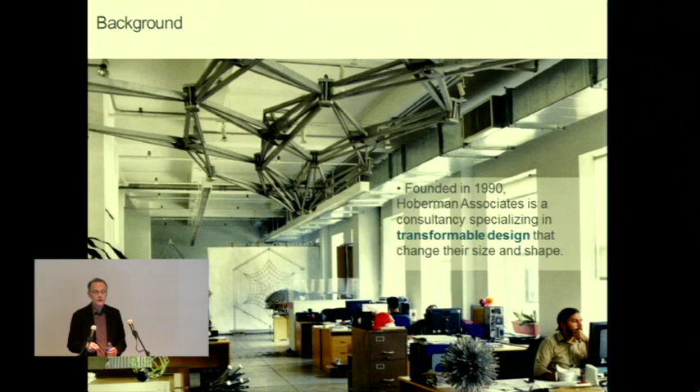I have a small practice in New York City, which is a design and engineering practice. We've basically characterized what we do as working with transformable design. To this group, I don't really need to define transformable, but I will because it's part of how I frame my work. For me, transformable is making objects, and those objects could be toys or stage sets or products or artwork or even buildings that change their size and shape physically and in real time.

These are some of the transformable projects we've done over the years. Our idea is not necessarily just how do I get from A to B, but what really are all the in-between states, the process of transformation, the qualities of that. I'm going to talk about this in a number of different ways. So we might start with this concept of size change, shape change, transformation in nature. If we look at water flowing or clouds morphing from one shape to another, this is kind of the idea of what I aspire to in design.

Or beyond something like clouds, we might think about organisms. We know there's no intentionality to evolution, but there's a kind of direction to how shape change and size change fits into the larger evolutionary program of adaptation. And of course, it takes a very long time for species to change their form and adapt from one stage to another. Or we might look at how organisms change within their own lifetimes, the morphology of an embryo changing; we're all changing size and shape, birth to death.

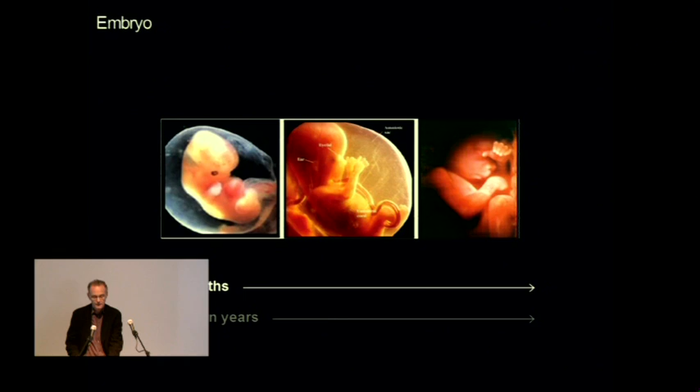And of course, designers do design things that transform all the time. Really towards the beginning of my career, there were those first animations of shapes changing into other shapes. Terminator 2 was a real big one when that first started to appear. Now we can design transformation, but generally in the digital world. It's virtual, not physical.

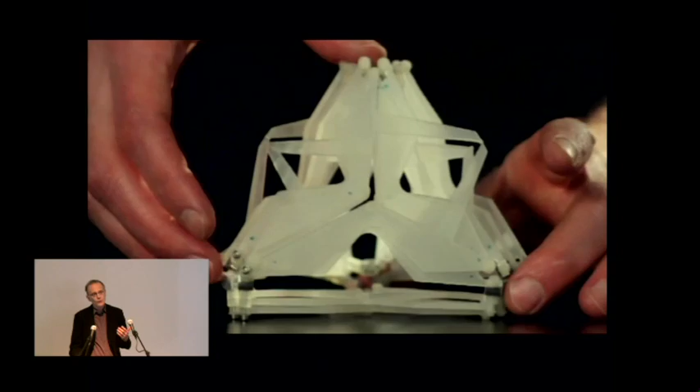So I am, by training, a mechanical engineer, also a sculptor, but I love mechanisms. And one of the things that I love about mechanisms is their tactility, the touch qualities of how they change manually and with hands. But also that the way the mechanisms are very physical, but at the same time, there's always something kind of ineffable about them, and that non-physical quality is the motion itself. Motion isn't really a physical quantity, it's about changing relationships.

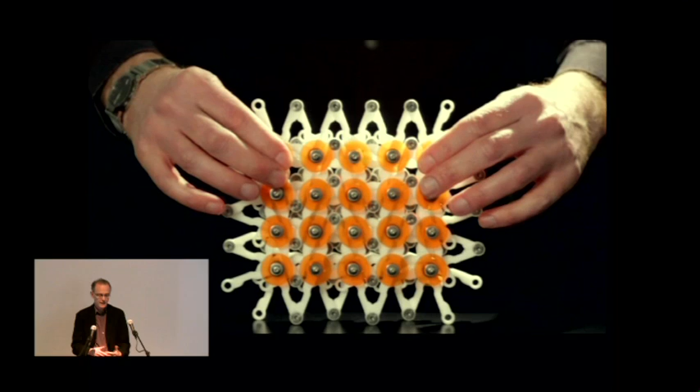And for me, mechanisms, you could define them as an embodied system of relationships. And designing mechanisms is a tradition of design that goes back hundreds of years. And it's something that I love. So we might start with basic paradigms of what these things are.

Traditionally, the way that you think about these engineering paradigms, and it still is true today in engineering schools, you have structural engineering and you have mechanical engineering. A structure, it's all about what an object does in relationship to forces. A structure will resist forces, but a mechanism takes those same forces and converts them into motion. So that's a kind of a dividing line, but of course it's somewhat artificial, because when we make something, structures always move at least a little bit, and mechanisms have to resist forces as well.

But then within mechanisms themselves, again, this is a little bit on the engineering side, traditionally, when I studied mechanical design and studied kinematics, the whole idea of designing a mechanism was to design a motion path, to design a trajectory. The mechanism as an object wasn't really the point. It was what it did. And this goes back to what our definition of a machine is. It's there to perform tasks, not just to be a kind of a designed object.

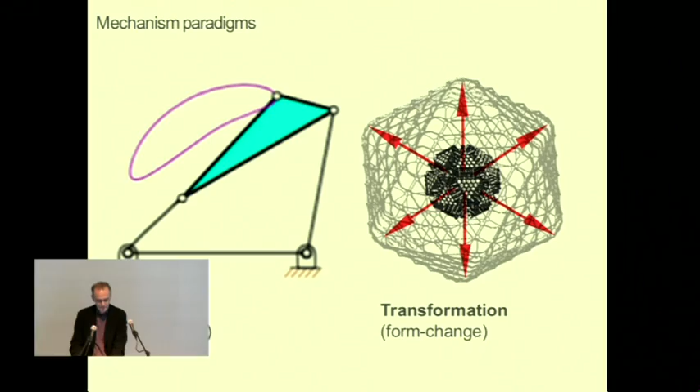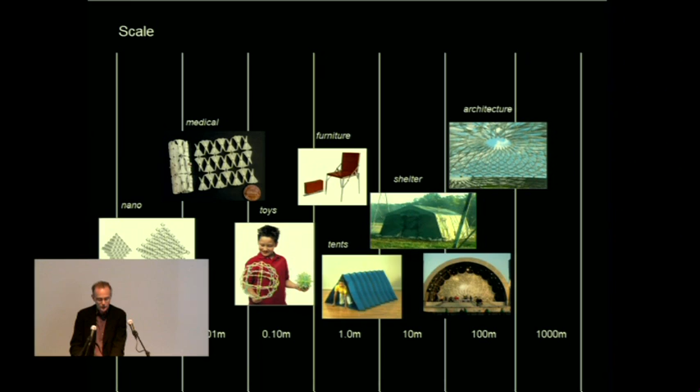And what you'll see in the work that follows is a different paradigm for a mechanism, which is transformable. In other words, it's focusing on the object. The function of the object is to transform itself by itself. And over the years, this idea that I have been working with now for decades has been implemented at a wide variety of scales in a wide variety of sectors, from miniature medical instruments up to architectural scale, with a lot of continuity of the concept through all of these different applications.

So just on the small scale, this is some work that I've been doing with the microrobotics lab at Harvard to make mechanisms that are in the millimeter range, and this is a little Hoberman linkage, about 8 millimeters across. And then at the other range, a project which we'll talk about a bit more, which is a retractable roof that we're working on now. Scale of the stadium is about 140 meters. The roof itself is about a third of that span.

You guys can get your own shot. No, don't worry. You should, because I'm terrible at sending stuff. Wow, we have a soundtrack. Do we have an AV person in the room? This panel has not been screwed down. Oh, I see. It's the video. Okay, I'm going to turn the sound off. There's a stray video. All right. Don't worry, guys. I'm not mad. Just slightly. I'll just delete that. It's off to the side.

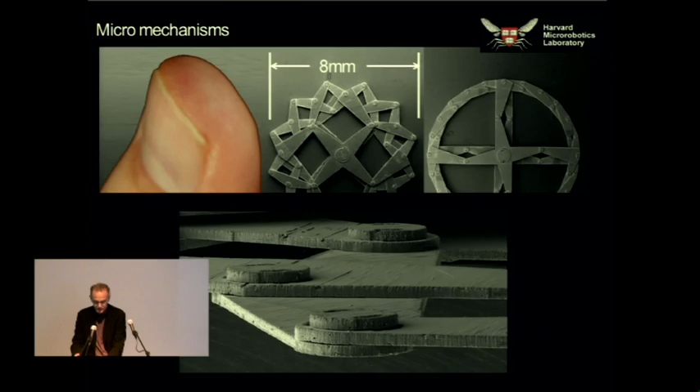So the thing that's, honestly speaking, striking is that the actual design of this object and this object in many ways is not dissimilar at all, and yet there are 3 or 4 or 5 orders of magnitude of size between them. So they're principles that are carried over very, very different scales.

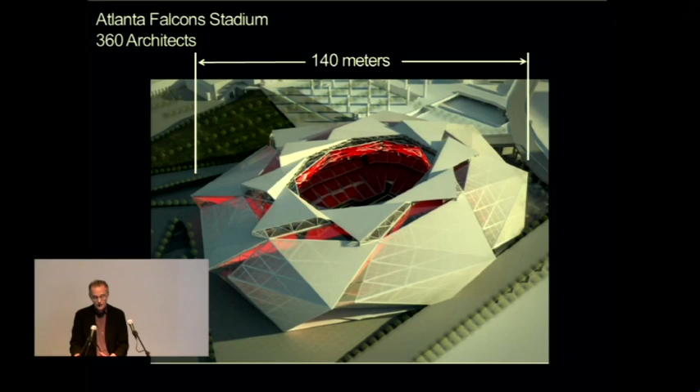As a designer, somebody who was originally trained as an artist and has gone on to work in engineering, I look at all of these as very creative directions and options, and that there's a kind of a continuity between the work of an artist and the work of a scientist. And in between is this idea of invention. And I am an inventor. I have patents. I've always liked the idea of invention. And when I think about invention, I like to look at what people have said about it who are inventors themselves. This is a quote from a French mathematician from the 19th century, which I love.

"Thought is only a flash between two long nights, but this flash is everything." And that's it. That's the aha moment. That's the light bulb moment. That's one of the things that I love about what I do, is there's always that chance that you'll be stepping out of the bathtub or whatever, and something pops into your mind.

So I'm going to talk about one invention that I had that goes back some 25 years or so that really informs a great deal of work since then, but it was something that really came in a flash. And I'll show you a little movie of this, and I think that you'll get what it is pretty quick.

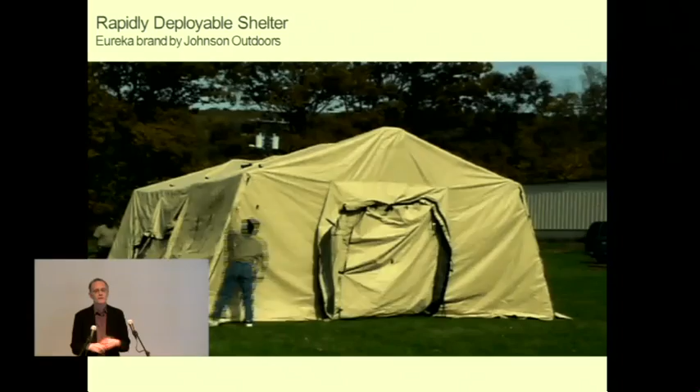So in this case, it's really trying to work in a very practical, physical way with a few people to get up a shelter very quickly that also is very strong for wind and snow loads, et cetera.

But the other side of this kind of physical reaction to these things is you don't necessarily need to touch them. I've done a lot of work in science museums for kids, and you just watch these kids, their expressions and their gestures when they're seeing the sphere open, and it's because they're feeling it in their bodies. And I've seen kids literally just fall backwards when they see one of these things opening in front of them because they feel like it's hurtling towards them. And there's something just very intriguing about that, these physical responses to transformable objects.

As an inventor, what I try to do is not to invent devices, but to invent classes of devices, to invent mechanical typologies, if you will. And out of the short linkage video that you saw and the patent that followed, this was the basis for a whole series of structures that I call shape invariant expanding structures. What that means is that there's structures that get larger, but their shape doesn't change.

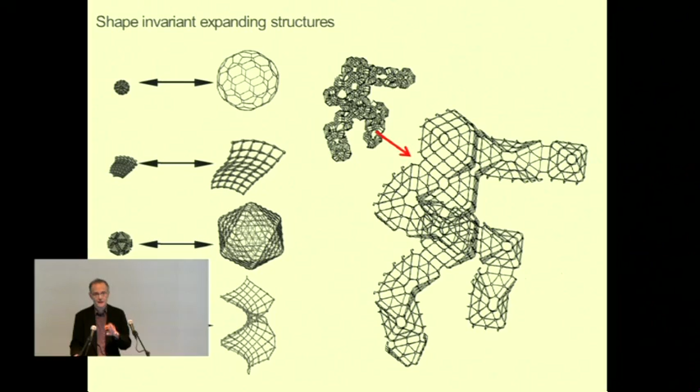And these are a whole series of different shapes that I've designed over the years, many of which have been built as well. The spheres that people are familiar with, sometimes they think the invention is the sphere, but in fact, it's the method to make expanding shapes themselves.

Making objects that expand but don't change their overall shape and profile has some other interesting qualities in terms of the motion itself, where all points are moving out in straight line trajectories from a center. So there's a kind of an expanding universe quality, and we use those straight line trajectories very often to create support points and motion paths. So this helicoid, this spiral, is held up by a series of straight line cables.

And here's another one of the sculptures in this series, a hyperbolic paraboloid, just another mathematical shape, and you can kind of see from the left to the right, this somewhat complex shape is actually just a kind of a pure scaling. And there's a lot of very interesting perceptual things about that type of motion. And here's an expanding dome that's being pulled out. It's about 6 meters across.

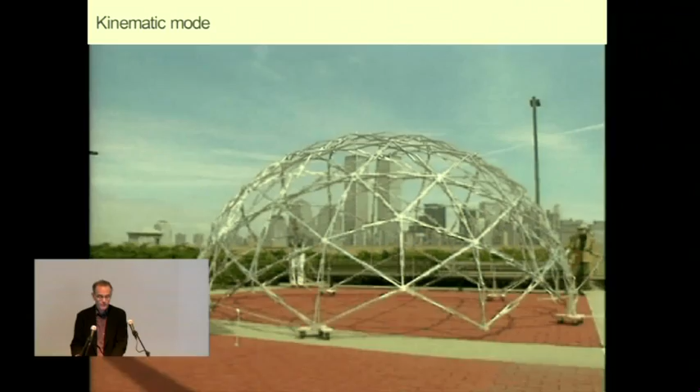So one thing that we might think about when we're making larger structures is you're making something that has to negotiate between its motion and its structural support. So we could say that something's moving from a kinematic mode to a structural mode. What you're seeing here is a dome, like a Bucky Fuller geodesic dome, that has many of the same qualities as a classic dome in the sense that it has the triangles, it has the shape, it has the same ground support. So what's happening here? How is something able to be both in motion and at the same time to be structural?

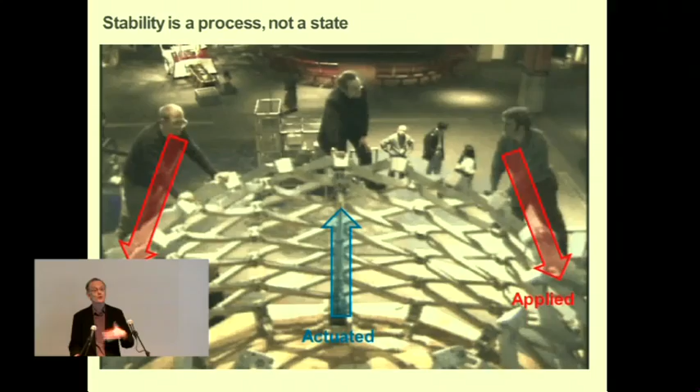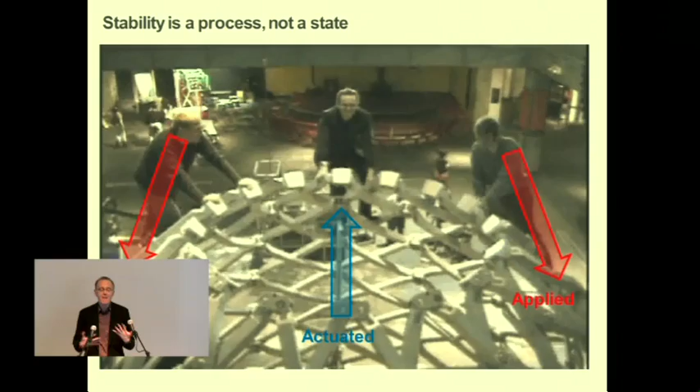This is me in an earlier day doing some of my hands-on testing. And the reality is that you're only making one object. It isn't like it goes from one mode to the other. It always has to negotiate the way that it reacts to these forces. So in this case, we're seeing a hydraulic cylinder that's pushing up on the dome. We're standing on it, which is kind of like an applied load. And this mechanism has to resolve all of these loads into what we might call a stable process.

Usually a structural engineer says it's stable if there's very small deflections. But when you're making a kinematic, a mechanical, a transformable object, you actually want it to move, but you want to move it in a way where it's safe and secure and in some sense stable. So it's kind of moving that idea of stability from a state to a process.

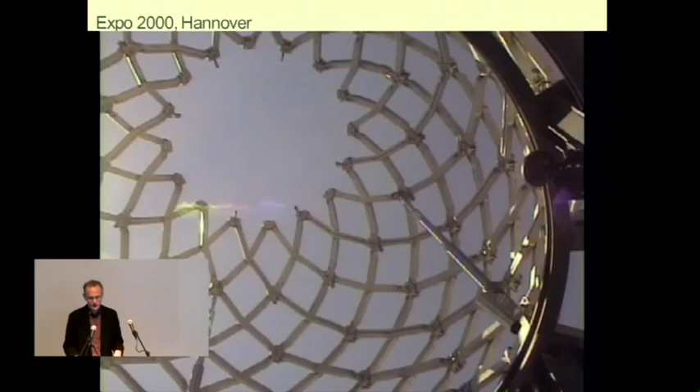And here's the same dome again as installed in the World's Fair in Hannover in 2000, where it was a kind of a symbolic representation of a historic cathedral powered by cylinders. It's about 20 feet across, made of aluminum. And I'll just show you a few more recent projects that we're doing.

This is a sculptural piece that we made for a couple of collectors in Bordeaux who have a vineyard, and was our first piece that we actually installed in kind of a natural setting, an expanding sphere on the terrace of their chateau. I like this slide because it shows a little bit of the craft of making these things. This is machined aluminum where these grooves have been machined in it to kind of reflect the light and kind of mix the light.

These are engineering challenges, but in a way they're also challenges of craftsmanship as well, with a lot of attention and focus on detail, on the joints, on the connections, on the actuation, and making all of these work as a system so that something like this can be installed, and in the same way that we're in a place where these buildings have lasted for hundreds of years, that something like this may not last for hundreds of years, but at least maybe for decades.

We've done a series of projects for live entertainment over the years. These tend to be a little bit intermittent and large scale, but they're some of the more exciting projects that we've had a chance to do. In about 2001, we were invited to build a structure for the Winter Olympics in Salt Lake City as a kind of a curtain where they gave the medals out every evening. So this was the Olympic Arch for Salt Lake City.

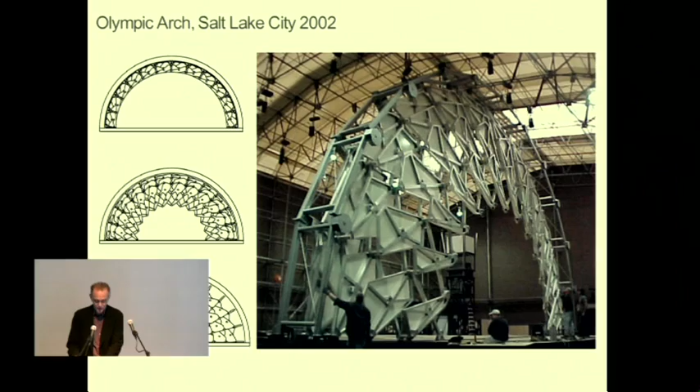And here you see it's about 72 feet across. And this was during the testing in Salt Lake City. So one thing I think about when I look at this video is standing in the freezing temperatures of Salt Lake City with the winds blowing. And there's a moment where you're taking this thing, which had been tested. This shows the indoor testing, which had happened earlier in New York. But there's a moment where you press the button, and it's terrifying. And your teeth feel dry, and you just don't know.

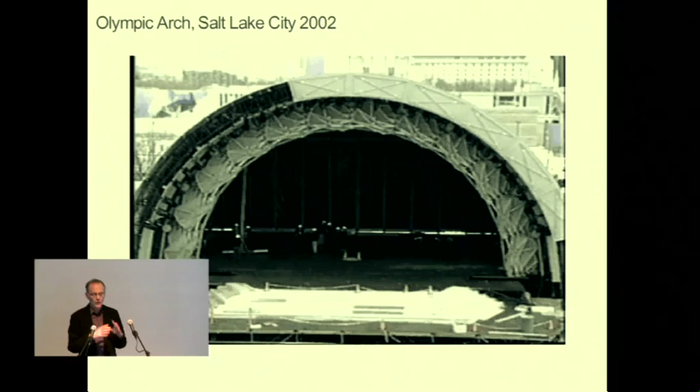But it is that sensation, which I think is the mood, the sensation of innovation, of having done all of this preparation and calculated all the risks and everything, but still you're pressing a button to say that 15,000 pounds is going to move a particular way. And it's exciting, and it's really what myself and my team are all about, going after those opportunities.

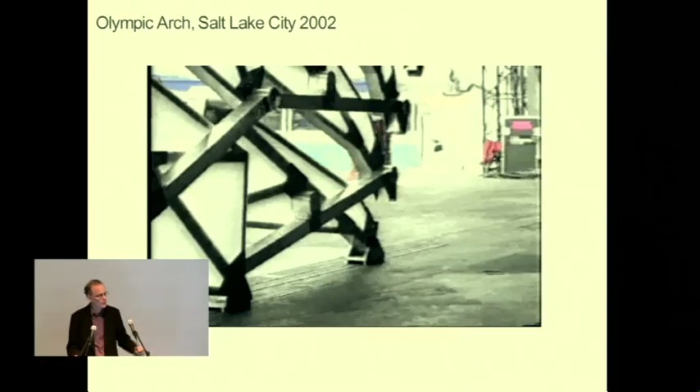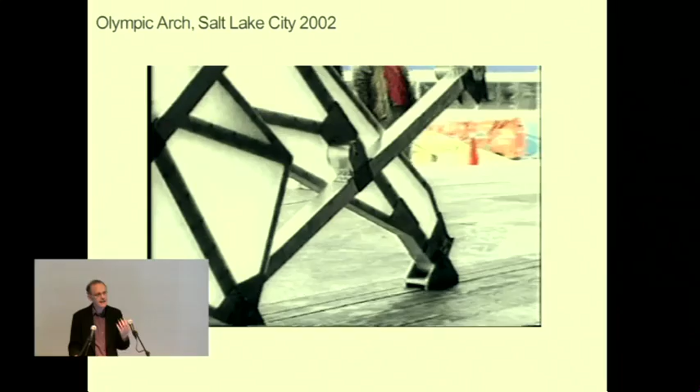So this particular piece is made of aluminum. It's a series of panels. Each panel is about 4 by 8 feet, like a sheet of plywood. It's aluminum extrusions backed by a polycarbonate backing. And so during the daytime, you look at it and it had a fairly tough industrial look. But then they would light it. This is 2002. They didn't have all the lighting options that they do now, but it was still these sort of Color Kinetics, multicolored lighting, and the way that the Lumasite material took the light was fantastic.

And then in the evening, it became part of the nightly show where they gave the medals out every evening, and you can see it opening here. So there was music, dance, the lighting. When the curtain first moved, there were some 20,000 people in the audience, and they really didn't know what to expect. Maybe they had seen it before on television, but when you see it for the first time, and it had all been choreographed, there really was this audible gasp when it first started to open. Really terrific project.

And then more recently, we had another superlative project, which was designing a transformable video screen for U2 for their recently completed U2 360 tour. And I'll take you through this project, which was really amazing on a lot of different levels.

By the way, did anybody see the U2 360 tour here? Always curious. One? Okay.

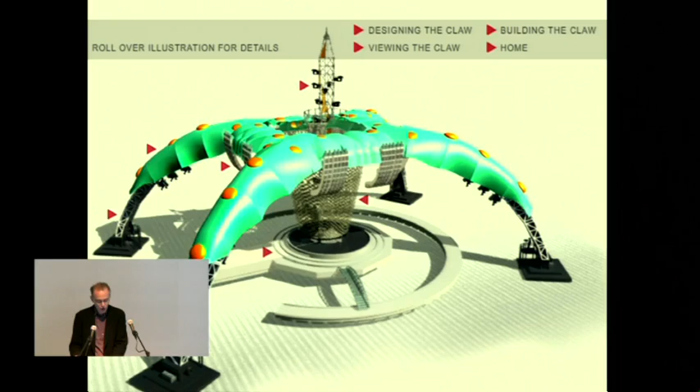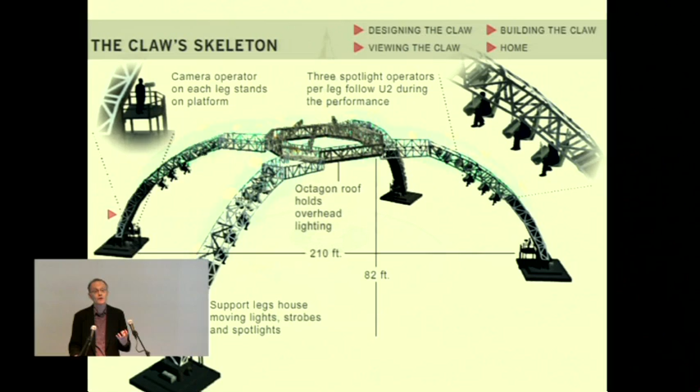The idea for the tour, it's an arena tour that traveled around. There's a big superstructure, which they called the Claw, which they would set up. And there were 3 of these steel structures built. And if you look at the scale, we're talking about not just building scale, but virtually infrastructure scale. This would be set up with a crane, clad with fabric, with a stage which had a lot of really interesting elements, rotating bridges so the band could walk from the inside to the horseshoe-shaped part of the stage. The speakers themselves are like a couple stories high. And then our piece was a video screen.

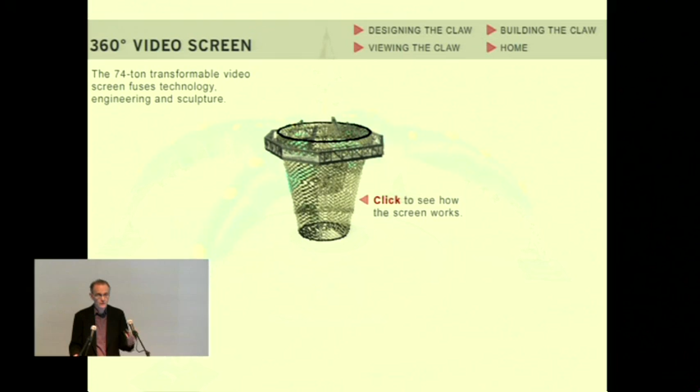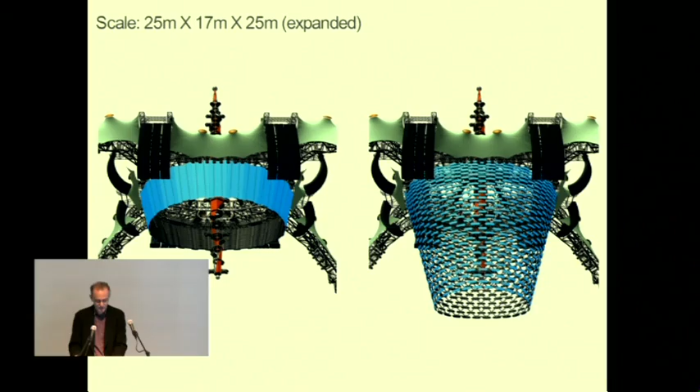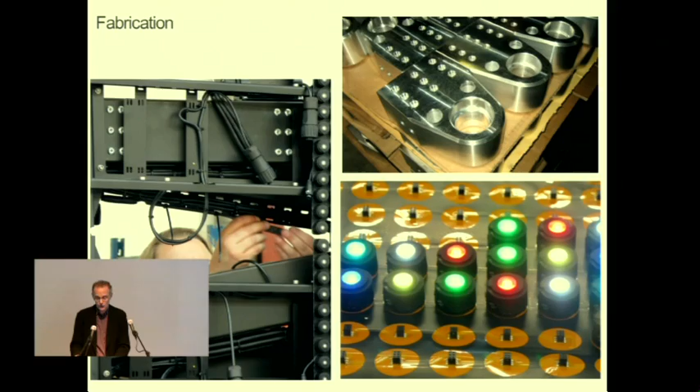These are early sketches, and we came up with this general notion of a structure that would be high resolution on the left, and then would expand down towards the band at some point during the concert. Through Mark's design guidance, we adapted the shape to this elliptical, conical shape. The blue is basically representing the high-resolution video. It's about 4,000 square feet, and then it extends down over the band, about 25 meters high. This is the manufacturer. During manufacturing, applying some 500,000 individual LED source lights, each about 25 millimeters across.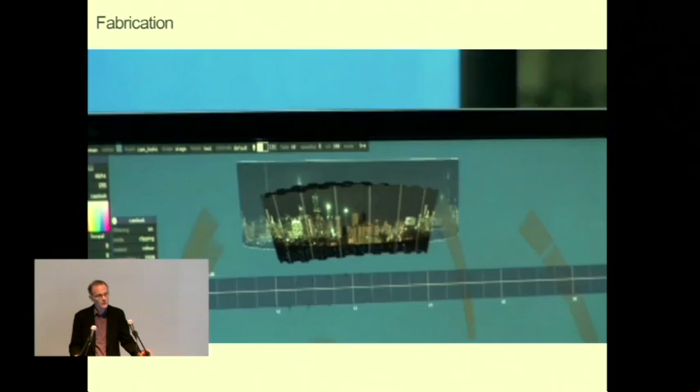And then this is a film that was made by Barco, which is the LED manufacturer, showing the assembly of the scissors, which are then packaged into these individual units. Each unit weighs about 700 pounds. There are 96 of them. And they actually invented these robotic forklifts to assemble it, an object that is some 30 tons, assembled together with all of the electronics in about 6 hours, which to me is the single most astonishing fact of this particular project. And then it was deployed around the world several hundred times, in fact. Really an amazing concert.

The screen kind of lived mostly during the concert as just an interesting shaped video screen, but this shows it moving. I think actually this was at Wembley Stadium. And you know, you're looking at something that is 30 tons, 7 stories high, moving in a way that is, I mean, it's unprecedented.

It was a project that, sometimes people will say, well, how much was it? Well, it was millions and millions. It was probably the single most expensive rock tour and probably the most profitable as well, ultimately. And yet, when I think about what was built, it was like sending a man to the moon or something, but at like 0.01% of the budget to do that.

It was based on just this amazing talent of engineering and design and tech and creative professionals who could say yes to these really crazy concepts rather than sort of worrying them to death where they ultimately would get killed. Anyway, it was really quite an experience.

This is a couple of shots from during the concert. Willie would just use this as this kind of palette that he would paint on. It was kind of almost like really a work of art in a rock show. A lot of interaction with the band itself. Bono used to call it his spaceship, which if you look at it from the interior, it really does have that feeling.

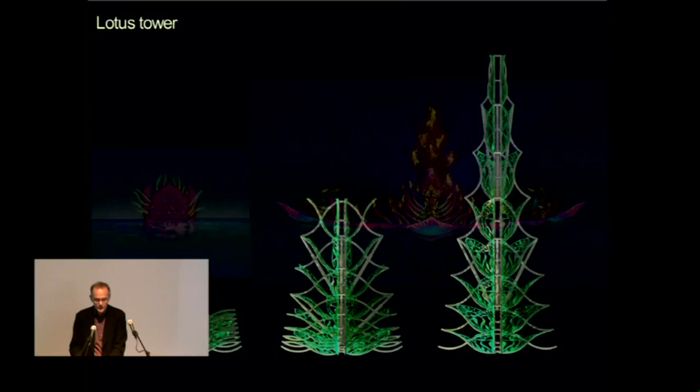I want to put in a small project that we're working on now for an entertainment company to make kind of a stage set. It will be part of a performance which has some things in common. They call it the Lotus Tower, and I just threw it in because it's more recent work. These are showing the sketches from the designer and then how it was translated by my team into a mechanical concept that could be structural and properly controlled.

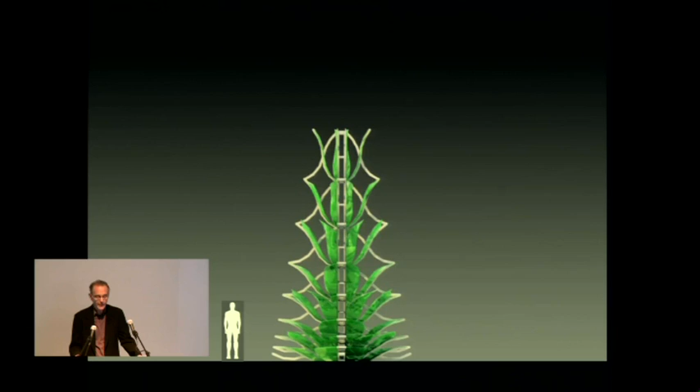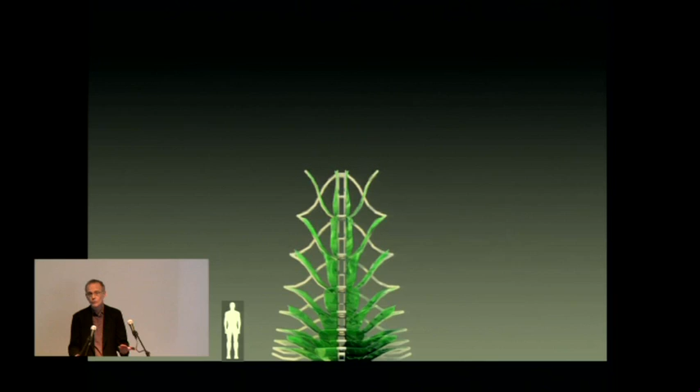And here's an animation. It's about, I don't know, 13, 14 meters high, it'll be powered by motorized linear actuators. I'm actually very interested in this kind of applique of the lotus leaf to the mechanics. That really gets back to my original, you know, I studied fine arts originally, and it's nice to do some things that are not completely governed by the structural mechanical requirements, but where you can start to become more expressive as well.

So we're in an architecture school, among other things, and I'll talk about our architectural projects. I've always loved the idea of transformable architecture, really from the start of when I got interested in transformability in general. Again, I'm not an architect. I'm trained as an artist and an engineer, but my dad's an architect, and I'm teaching in an architecture school. And it was really only in about the last 10 years that I started to have the opportunity to apply these technologies to actual buildings rather than pieces of art or entertainment or symbolic buildings.

And this was one of the earlier projects that I worked on, which is the dynamic facade in Tokyo. It's a beautiful building. It doesn't have a lot of Hoberman technology. They're really a series of programmable shutters that open and close, but it was a great opportunity to make kind of a first dynamic facade with a really great design team.

Around that time, I began to invent a series of structures that were based more on the idea of transforming surfaces rather than volumes, because when I thought about what's a practical way to implement transformability for buildings, I thought maybe it's the facade. That seems to have more opportunities for sustainable performance and practical installation than making a building that actually does a lot of volume change, which I explored a lot sculpturally.

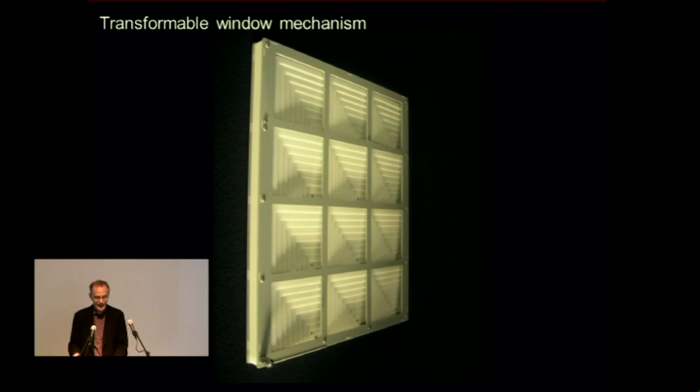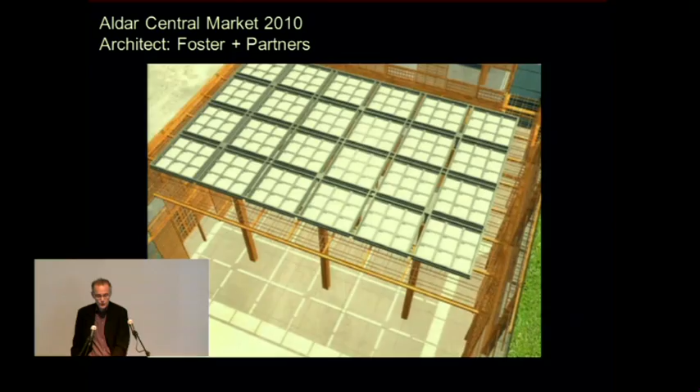So one of the really early opportunities was with Foster and Partners, where we worked on Aldar Central Market, which is a development in Abu Dhabi. The Foster team was very open to the idea of using our technology, and ultimately built this roof that's in a retail environment, a souk, but that's actually an exterior roof in Abu Dhabi that opens and closes, mixed with the mashrabiyah, the fixed fenestration of the rest of the project, built by a firm out of Dubai.

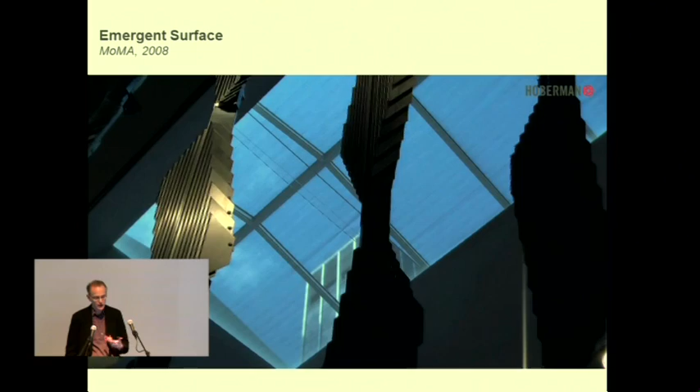This was a sculpture that I did at the Museum of Modern Art in 2008, which was also an exploration of these surface transformations. They're made of counterbalanced diamond mechanisms that open and close that are wrapped onto a doubly curved surface. So when you stand back, it almost feels like these diamonds are rotating in and out of the plane, but they're actually slats that are moving within the plane.

And in a more imaginative sense, what I'm interested in is wrapping a building with these surfaces that can open and close in very interesting ways, in ways that enhance the function of the building as well. And you can see a little bit more of the mechanical detail here.

Another one of the technologies in this series is for transformable screens, which we've named Tessellate as a kind of product or technology. What you're seeing here, which is, by the way, not an animation, it's actually a film, is layers of perforated metal that are being shifted relative to one another with our patented mechanism, and it creates this kind of kaleidoscopic effect. It can be installed on the interior or exterior of a building and can be used both for decorative purposes but also for light control and thermal management as well.

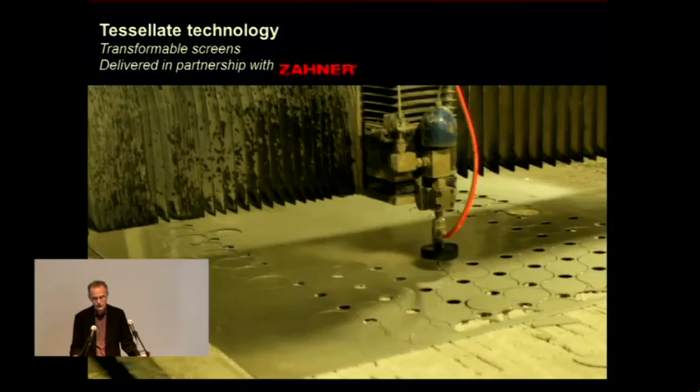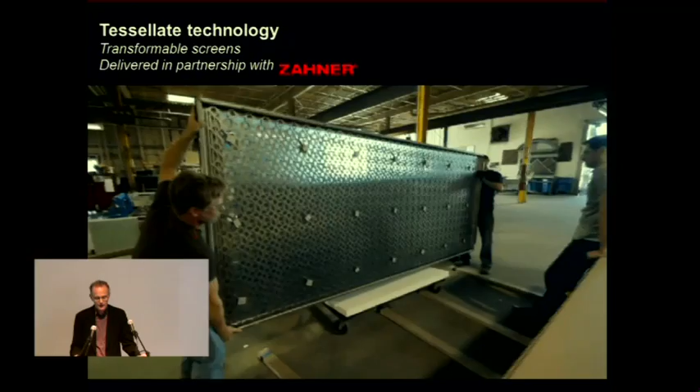We work in partnership with a factory in Kansas City called Zahner. They do some of the most spectacular metal facades, and you can see here the panels being assembled and hand tested. These are about 5 by 12 feet layers of stainless steel that are, I don't know, about 2-3 millimeters thick individually.

We'll just go through a couple more architectural projects quickly. We do have some large projects that are on the boards. They take a while to implement, but I'll introduce you to a couple of them. This is a project in Saudi Arabia, which is part of the King Abdullah Financial District. It's a city that's being built in the middle of Riyadh. There are these developments that we don't see a lot of ourselves, but they're just enormous.

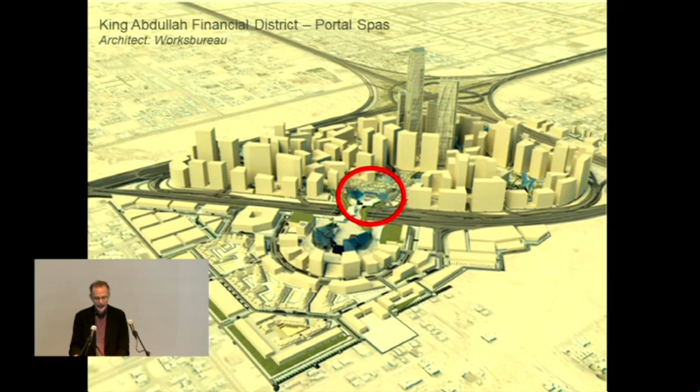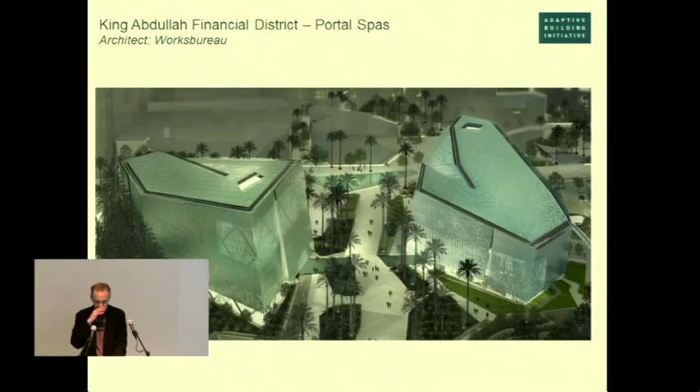And we were invited to join the team that was designing two buildings, which are spas, one for men and one for women, which will be clad with titanium screens, all 4 sides plus the top. And of those screens, about 20% of them will be dynamic. So it's a huge project. Absolutely, it will be a real first for us.

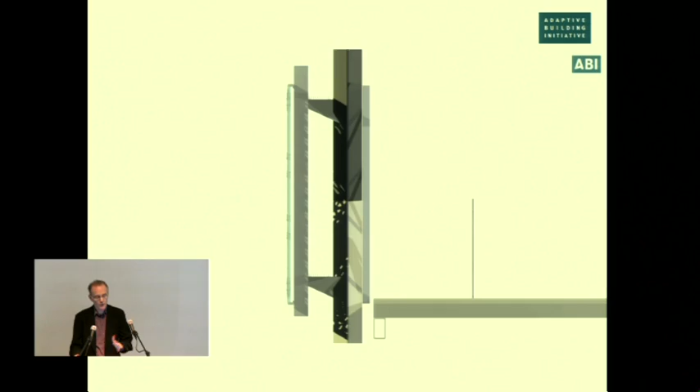You can see an early animation during schematic design of the external skin of the titanium, and then as it rotates around, you can see its relationship to the glazed surface and the structure that both of those hang off of. And here's another part of the animation which shows the interior views.

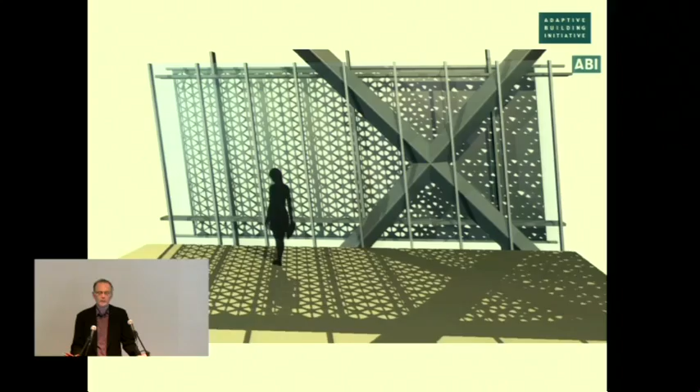So there'll probably be some questions about sand, about longevity, about how you develop this kind of innovative technology in the context of a project like this, all of which may be an interesting part of the conversation. But clearly, it needs to be a project with a budget and a client with vision to make all of this work. And in this case, it looks like we have it, although the project has not gone to construction yet, but the design is complete.

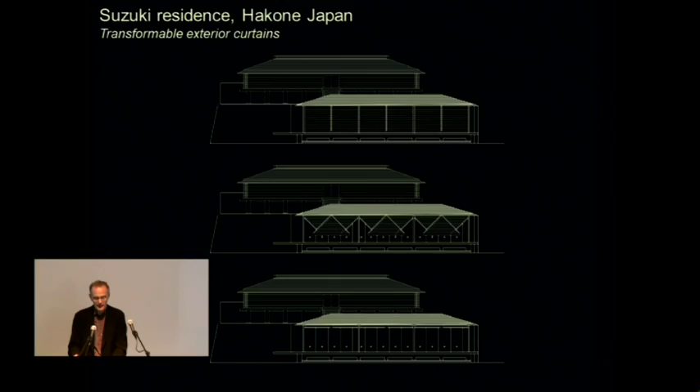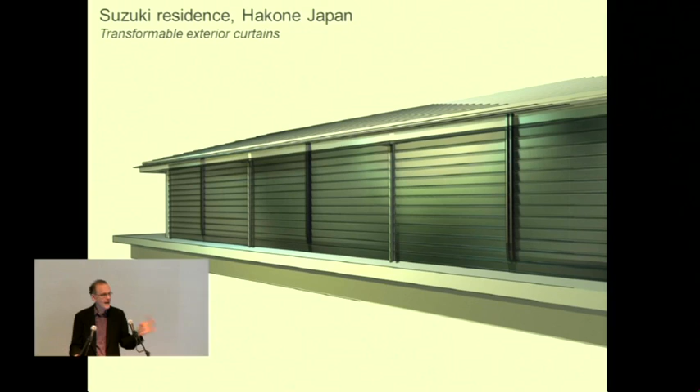So you can see here, what they wanted was very large curtains, 4 meters by 9 meters across, that would disappear into the eaves of the roof with no tracks or external supports. And this shows a prototype of the concept where these slats are kind of raised in. We're hoping we're going to get the green light to begin construction on this shortly. I think this will be made out of perforated metal. We'll work with our friends at Zahner on this as well.

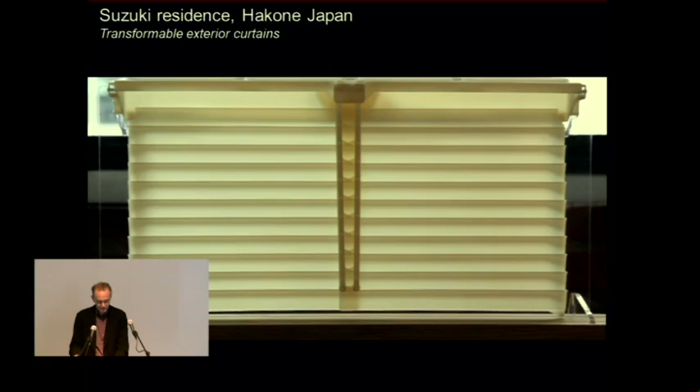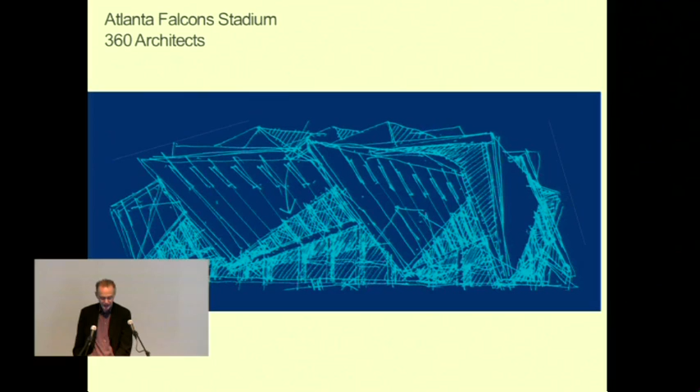The last architectural project I'll speak about is a project for a retractable roof for the new stadium that they'll be building in Atlanta for the NFL team, the Atlanta Falcons. It's a project that just started in 2013, but it's actually moving on a pretty good pace. So we joined the team. It's a sports architecture group called 360 Architects, and we work with our longtime engineering collaborators at Buro Happold on this. And the idea when we were on the competitive side was we wanted to come up with a concept that would display innovation on all kinds of levels for stadium architecture.

And for those of you who are interested in retractable roofs over stadia, which is one of the few areas where kinetic architecture is widely accepted, there's been a kind of stasis in the design of these things for a long time, where basically most retractable roofs are panels on tracks that move back and forth. There might be one, there might be two, but they more or less are very pedestrian in design, although very large in scale. So the idea here was to come up with something that would have a more

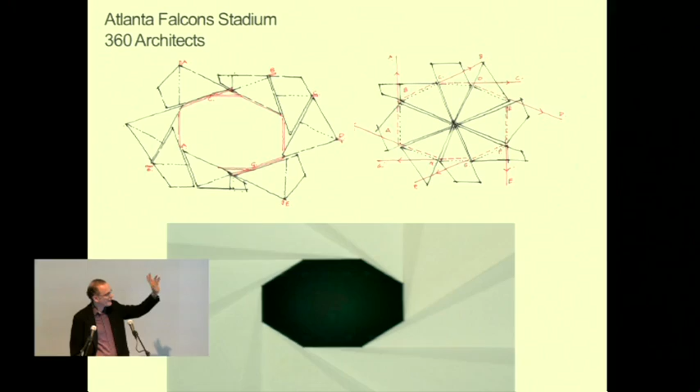integrated design concept. I don't have the best video, but what you're seeing is the diagrams on top, and that very abstract octagonal shape you're seeing is actually the physical movement of the panels. And here you can see it a little bit more legibly. So we're getting an aperture that's all being made with linear motion. There's no rotary motion at all. But the scale of each of those pie slices, from tip to the first corner going back, is about 250 feet. They weigh many, many tons.

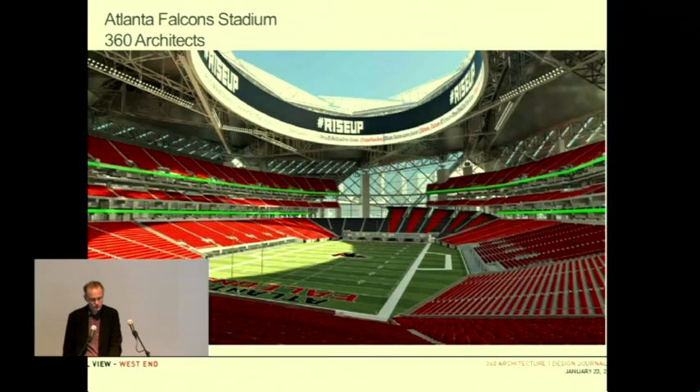And we're not the sole author of the concept. It came out of a lot of team interactions with the architect, with another mechanization consultant, Uni-Systems, and with Buro Happold themselves. And this is due to be built in 2016 and would be by far the largest kinetic structure that I've worked on, and one that I think will really open up new design horizons in stadia. So it's a very, very exciting project.

Now, inventors always are most enthusiastic about what they've been working on last. And so that's what I'm going to talk about now as we close the talk: some new research developments and horizons that interest me, and I hope will interest you as well. So, as I mentioned before, probably the single most seminal invention that I came up with was this way of making expanding structures.

But what's always interested me is not to make something that gets bigger without changing its shape, but could we design objects that we could program to go from shape A to shape B, but really do it the way a digital designer does, just specify it and then have a technology that would actually physically make it happen. And I can't say I've cracked that code yet, but I've made a little progress and I'm having a lot of fun with it. So this shows more conceptually what we're talking about here, where you could match up any two shapes, which would then bring us into the original big project, which is how do we make objects that transform the way they do in nature and design them the way that they do digitally.

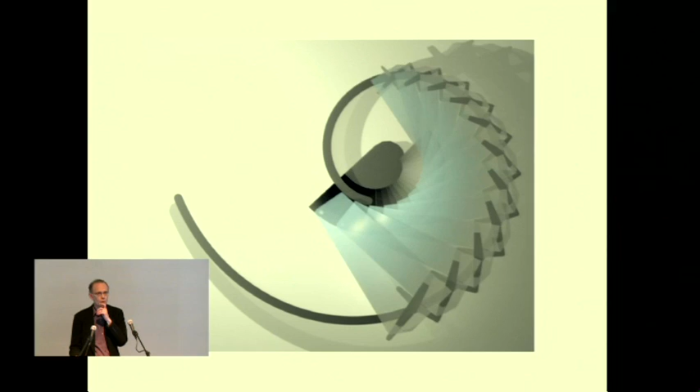So I was going back through kind of my portfolio of old concepts that had never been built, looking for clues. This was a kind of a nautilus shell that folds itself up on a spiral track. Thought this had a nice shape transformation.

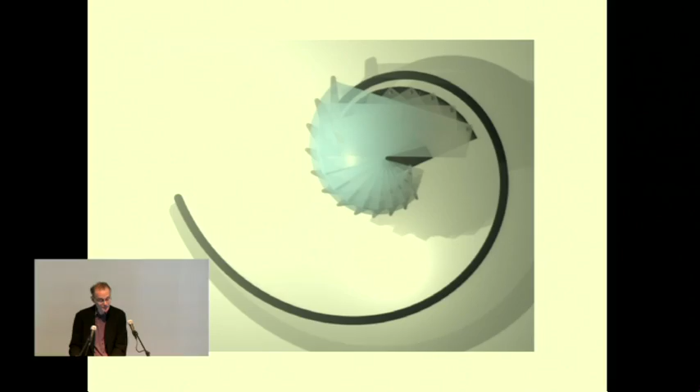I had done some work, I don't know, 5, 6 years ago for a theme park project for these transformable trees, and this was another part of it, of how to make things that were more expressive and sculptural rather than being so highly constrained and technical.

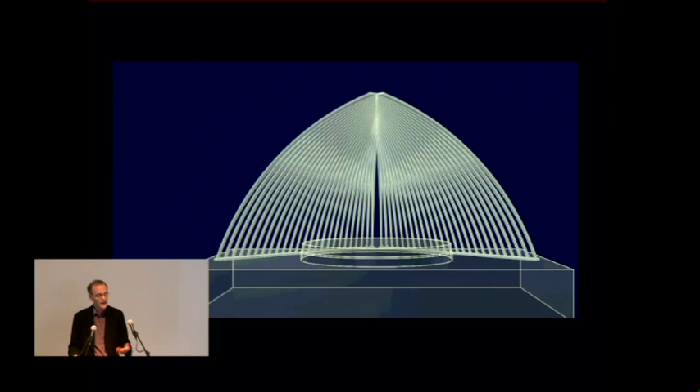And then this began to develop. I saw another way of making these spinning forms where it's more of a volume that somehow twists itself up and corrugates itself. And this shows the animation and then the prototype. And I really liked this model. I mean, the shape transformation is very straightforward. It's just a cylinder that turns into a sphere.

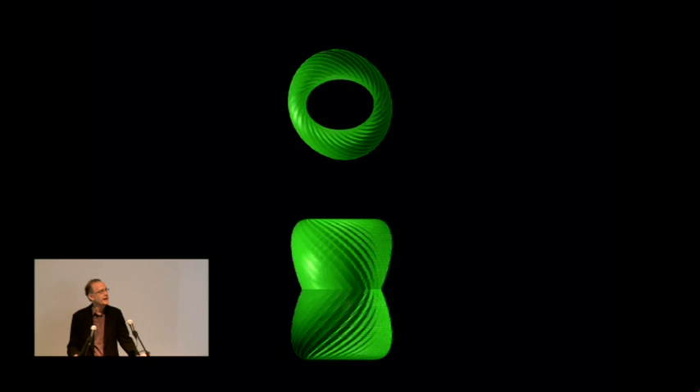But I began to think about how could I generalize this way of building to make a wider variety of shapes. So this is showing a plan and elevation of an elliptical shape rather than a round shape. And it's a very intriguing motion and essentially buildable, which is always my thing. I mean, these are very abstract animations, but I could build this given some time and money and all that.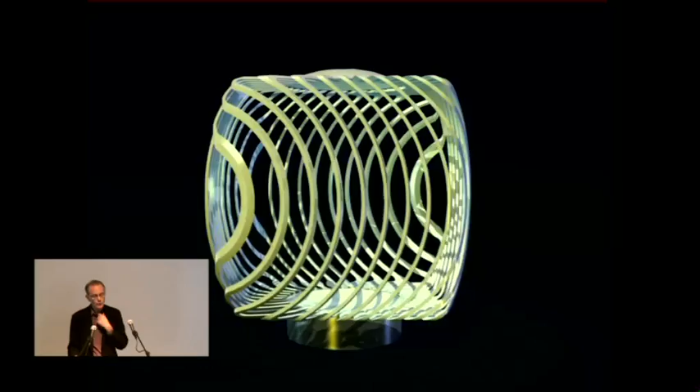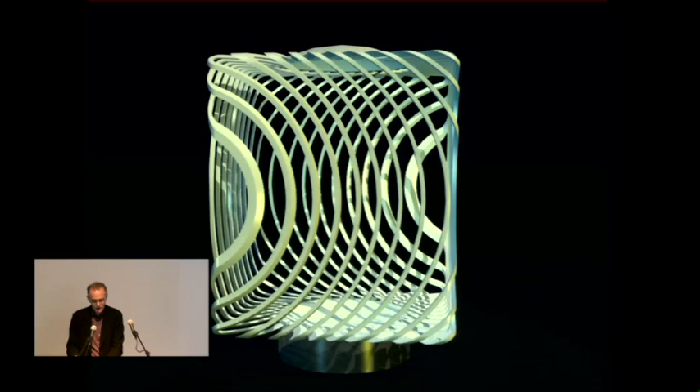How do you build these? So one thought was, let's simplify it, and rather than making a continuous surface, we'll just make a series of bent tubes. And this shows an early design for that concept, which is a sphere that turns into a cube. I'll just play that one more time. So a sphere, and what you're actually seeing are rigid objects that are all just rotating themselves around, but the overall form goes from sphere to cube.

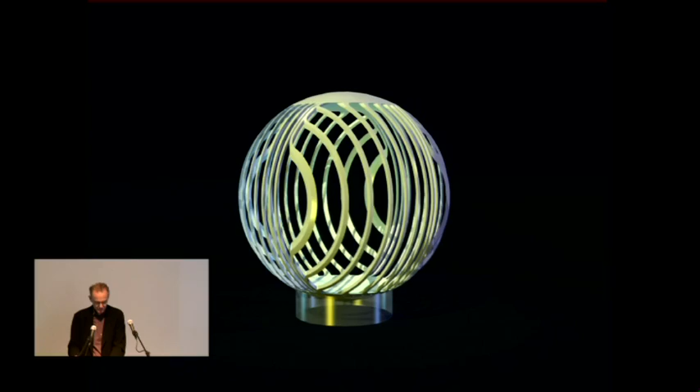So that was pretty cool, and we actually have a commission now to build a small one of these, kind of a tabletop. So that will be fun to see that. Other explorations that were done at the time were something that would be a little bit more freeform, that would undulate in sort of more of a 360 fashion. And again, it's all about creating these curved splines and their relationship to each other.

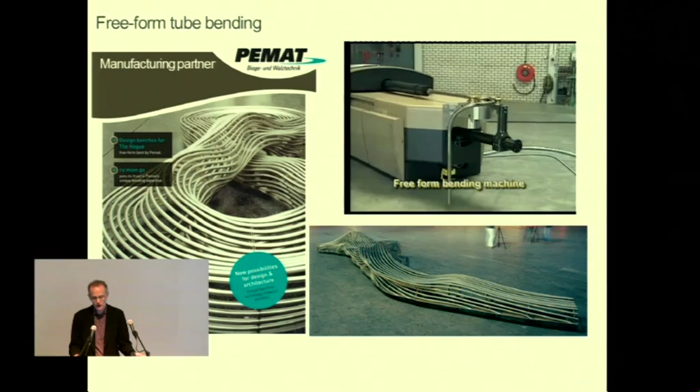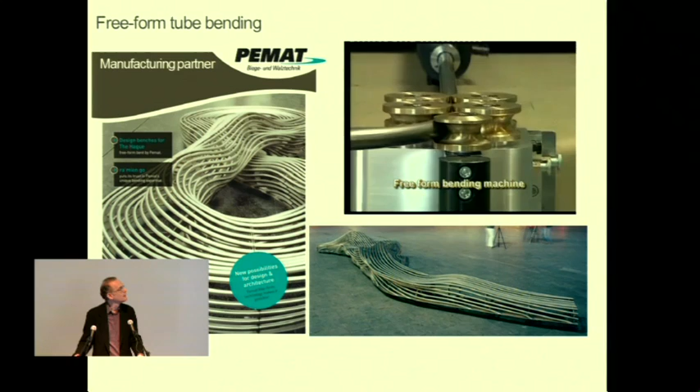How do you make a freeform tube? Well, you go to the factory that makes them. It turns out that there are these machines that basically can bend a tube into any three-dimensional curve you want. So the pressure of the rollers is being combined with a push axis and then a rotary axis on the stainless steel tube itself. And so long as the tube doesn't hit itself, and also there's a minimum bending radius, you can make just about anything. It's a factory in Switzerland that we're starting to work with.

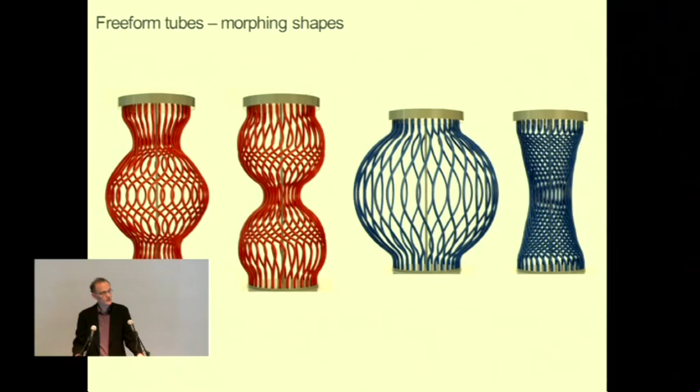We got a commission from a private collector about a year ago to make a couple of shapes. These show two of them, and you'll see them here. So this was the simplest of the, we actually made three of them. The third I don't have in the slides. So this shows our sort of convex to concave.

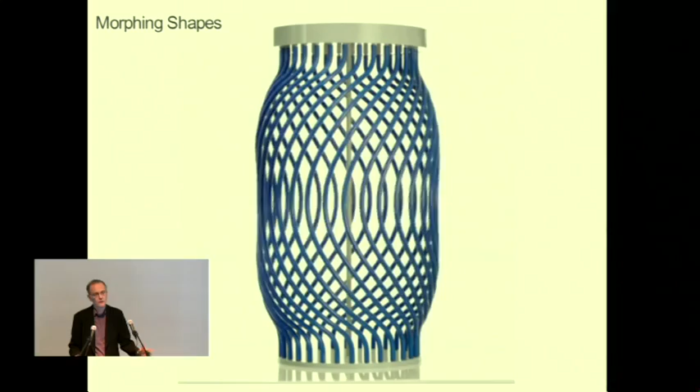It's 30 identical stainless tubes that are all being rotated around their axis. So the top and the bottom of each tube is collinear, and it's just the geometry of the spin that makes it change. And you get, as kind of a little bit of a freebie, a wonderful sort of moire effect along with the form change.

And then if you check this one out, just slightly more complex, but again, 30 identical tubes. And it really is like a little uncanny. I mean, the motion is really incredibly simple, but I've had people who have physically been in the same room as one of these objects and said, how are you making the tubes bend? But the tubes are bent, they're rigid, they're not bending, but it's the way that our eye interpolates it.

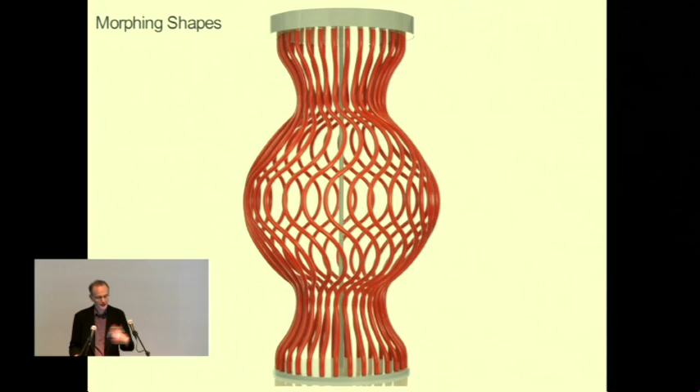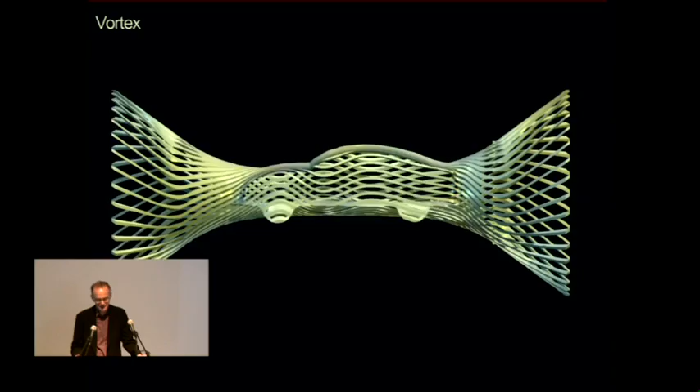And taking that same kind of a concept, making it horizontal, we can even make some figurative shapes. If anybody wants a vortex that turns into a car, you can talk to me after the talk.

So I'll close with one more. This is an animation that we developed for a sculptural competition, which I didn't win, but the work was fascinating. I'm sure it's going to find some life in other projects. So I was really trying to go to that first part of the program for morphing shapes I mentioned, which is how can I make something turn into something else?

And in this case, the competition was for an art piece for a children's hospital, for a pediatric hospital. So I was looking for shapes which I thought would read for that, and I thought about making a moon that would turn into a star. And it turns out that when you're designing, if you want to find out what shape of tube will make a moon turn into a star, the curve is defined by the intersection between two surfaces. And I think even without being a mathematician, if you just visualize a little bit, you have two surfaces where they would intersect, they're going to make a one-dimensional curve in space.

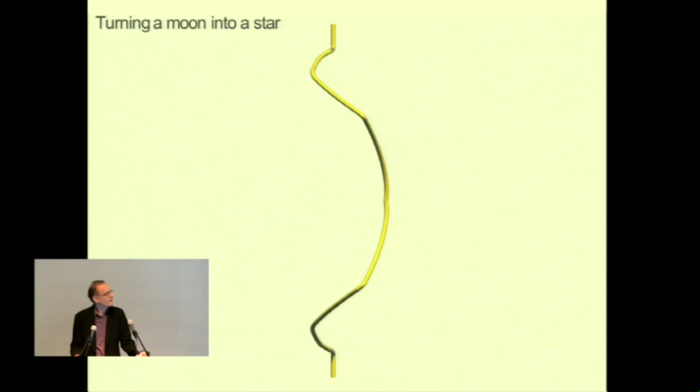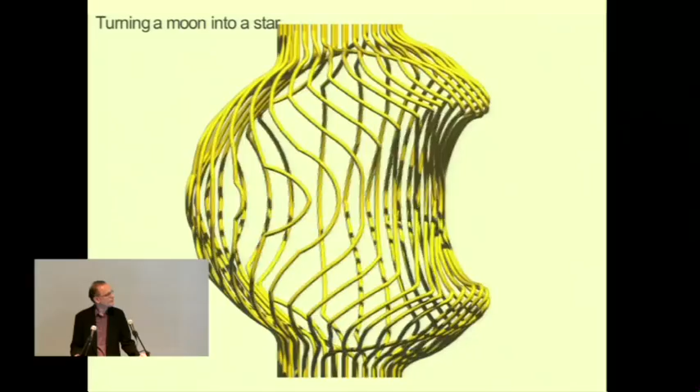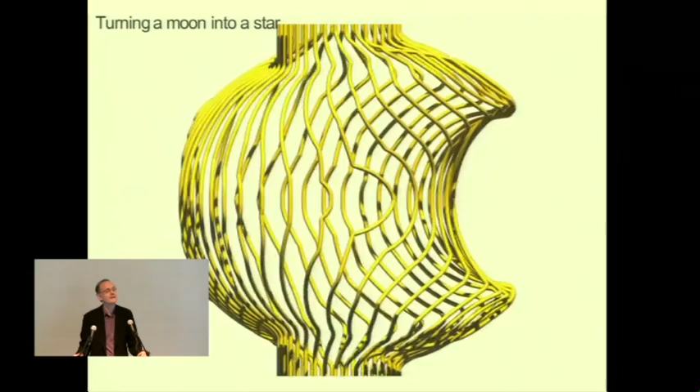And there's the curve there. That's a single rigid tube which is being spun. And then when it's joined with 36 other tubes and we spin them, we'll see the moon shape coalesce. And then there's one more trick, which is taking the whole bottom and spinning this as an array. In other words, all the tubes are spinning individually, but the whole unit is spinning at the same time, and then you get your morphing effect from moon to star. So this was a lot of painful trial and error, but it works, and where that leads is anyone's guess.

I kind of think about it on two levels. One is, how do I make more cool sculptures out of free-form bent tubes? But the other is really a much broader question, which is, if we as designers and engineers and creators can design things that transform the way that they do in nature, and according to how design happens in the digital realm with so much freedom, where does that lead in the broader sense? And that's kind of like what I'm about. And I've been lucky enough to pursue this for the decades that I've had and had a lot of fun. So I'd like to end with something. I couldn't really think of what to end with, so we'll just end with that.

I do think we're just at the beginning. I think there's a lot happening that is going to be incredibly exciting. I'm starting to see among my own peers and students and proteges how these ideas are being picked up and taken in all kinds of new directions. And I hope that some of you will be part of that advance of the way that design progresses and the way that we can innovate and be creative. So thanks very much.